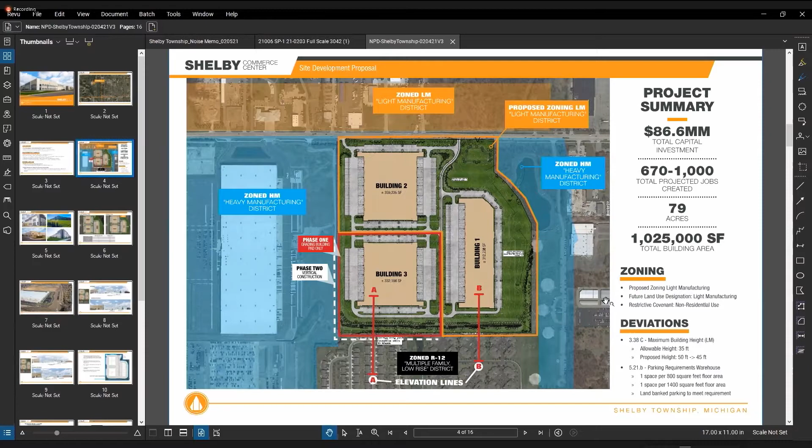Here's a side-by-side comparison of the original concept plan and the new concept plan. The plan on the left is what we presented at the January public hearing, and the plan on the right is the updated concept plan. The main change we made for tonight is we took another look and reduced the overall lengths of building 1 and building 3.

What that allowed us to do was increase the building setback and increase the buffer yard from that southern property line, where the residential properties are. So we took the building setback from 143 feet at building 1 to 249 feet, and from 216 feet at building 3 to 267 feet.

We were able to increase the overall buffer yard width from 90 feet to 147 feet at building 3, and to 170 feet at building 1. The other thing this allowed us to do was increase the berm height.

If you recall, we were proposing a 10-foot tall landscape berm with a 10-foot tall privacy fence on top in the original concept plan. This additional buffer yard width allowed us to take that berm height to 18 to 22 feet, with an average of 19 and a half feet along the entire southern property line. We kept that 10-foot tall fence on top, so our overall height now averages 28 to 32 feet across that entire southern property line.

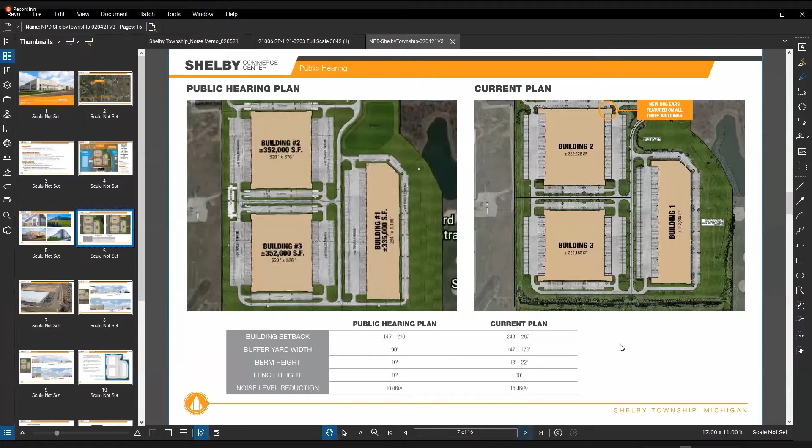Just to illustrate what those look like, this is an aerial picture of one of our buildings in Kansas City that incorporates these dog ear protrusions. You can see it's additional office space that sticks out approximately 60 feet from the building and blocks the trucks as they're backed into this truck court area.

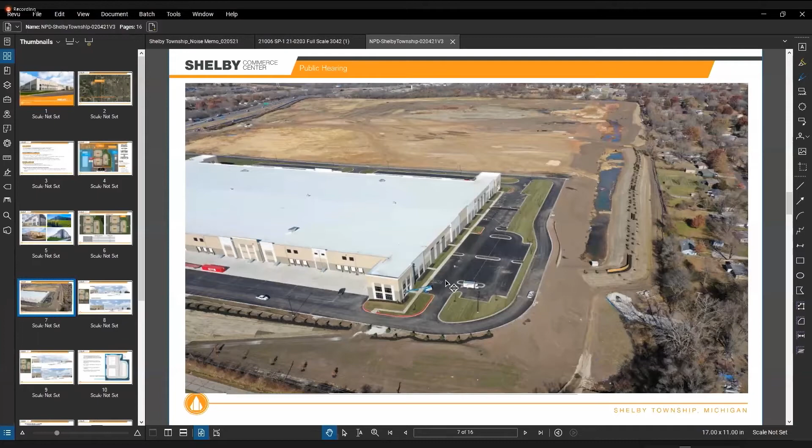This picture is a pretty good representation of the residential backing up to the industrial and what those homeowners see in this particular instance, and it'll be very similar to what this development will look like.

To further help illustrate the differences that this additional setback and additional berming made, we've taken a look at the cross sections we presented last time compared to what the cross sections are today, based on our updated grading plan and setback.

This is an illustration of what residents will see as they're looking at building 3 from the south. The bottom cross section was from the presentation at the January public hearing meeting. You can see the proximity of this truck road to the residential property line, and the sight line of the residences where they were seeing about the top third of those industrial buildings.

Now, as you go to the top cross section, this is what it would look like based on the plan we're presenting tonight. You can see the magnitude of that berm increase - it didn't only get taller, it also got wider. The setback of the main roadway from the property line increased, and the setback from the building increased. You can see that sight line now, as you're looking from this residential property, you actually look over the top of that building. So it's a pretty significant increase in both view and sound, as we'll get into shortly.

Same concept on this slide, except this is looking at building 1 from the south. Again, the bottom cross section was the original concept plan, and the top cross section is with the proposed increased setback and increased berm height. Again, these residences will be looking over the top of that proposed industrial building.

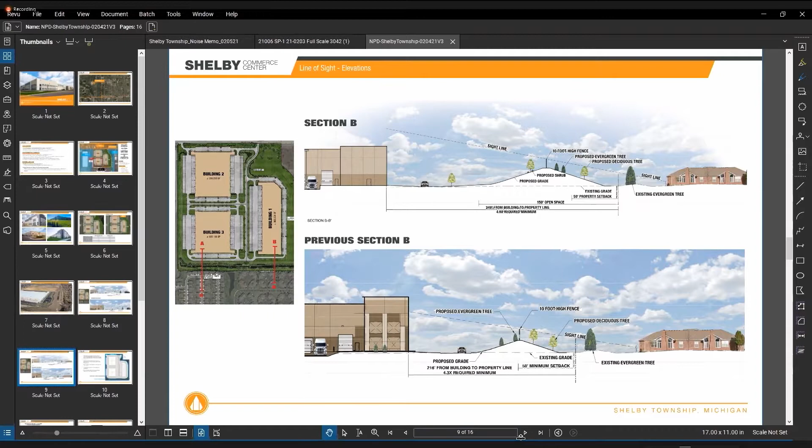We updated our photometric study based on this new concept plan. The dark line is the boundary of the 0-foot candles that the light from this development will produce, and the blue line is the original concept plan. As you can see, specifically along the south where the berm is increased, the light spread becomes even farther from those residential properties based on the new concept plan.

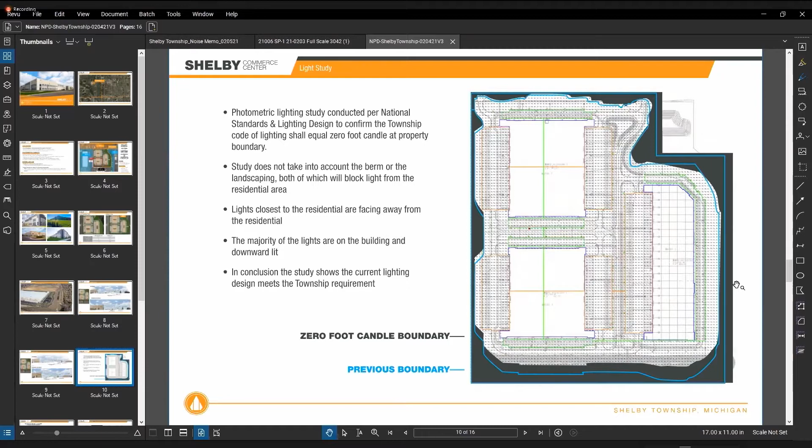We also went back to our consultant who prepared our sound study for us. I took 3 snapshots here to illustrate the changes we've made to the plan over time. The upper left-hand corner was what we presented at the neighborhood meeting back in October, with just the 6-foot berm and no fence. You can see the sound line traveled pretty far into the residential neighborhood.

The bottom left is what we presented at the January public hearing meeting with the 10-foot tall berm and the 10-foot tall fence. You can see it's a significant improvement over the 6-foot berm. The picture on the right is what we're presenting tonight with the 18 to 20 foot tall berm and the 10-foot fence, which helps further limit the spread of sound that's over 65 decibels.

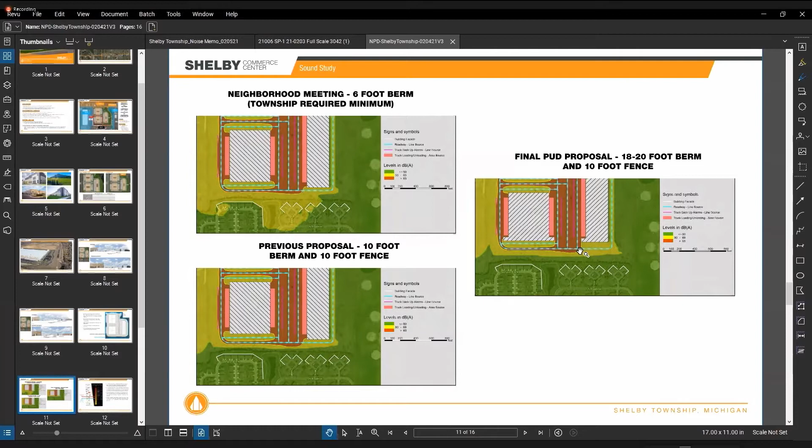Again, this was presented at the last meeting, but it's a good illustration of decibel levels compared to everyday household items.

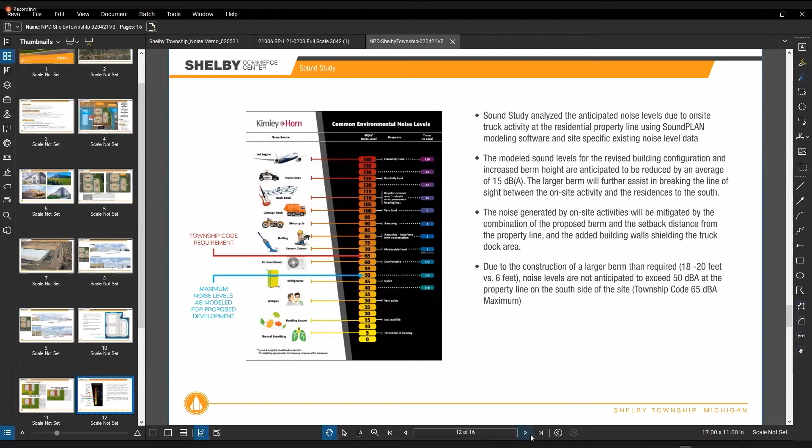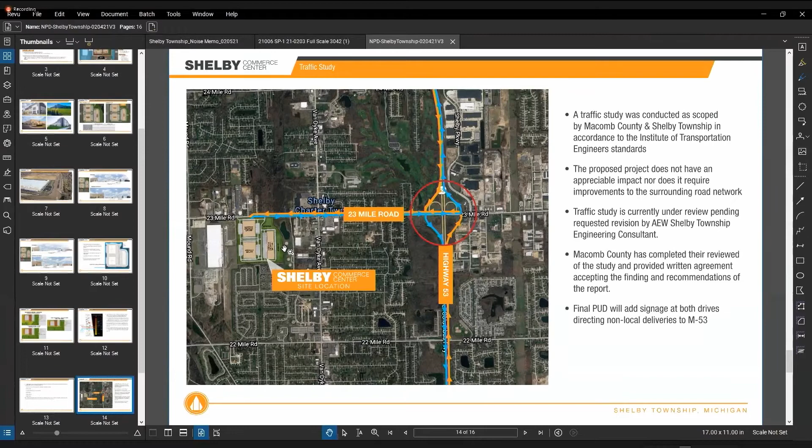Our air quality study didn't change based on the updated concept plan. We're still well below the forecasted annual emission requirements limited by Michigan air quality requirements. The traffic impact study didn't change either. Ingress and egress into and out of the site didn't change, and access to 53 didn't change based on this new concept plan.

One thing I wanted to get into tonight was the criteria that Shelby Township has to evaluate each zoning request on. The Shelby Township zoning ordinance states that the commission needs to evaluate each zoning request on 4 criteria: 1, the practicality of the request and the effect on neighboring property owners or the surrounding area; 2, the owner's right to use his land; 3, do current growth and development patterns warrant this rezoning; and 4, is the proposed rezoning in accordance with the Shelby Township master plan?

We feel that the Shelby Commerce Center development meets all 4 of those criteria. Our proposed zoning is compatible with the uses on the east, west, and north sides of this property, and we've greatly exceeded the required minimums in the township code for building setback, berming, and landscaping in order to reduce the impact on the residents to the south.

Secondly, the owner currently has no ability to develop this property based on the current zone due to the environmental contamination. Therefore, we feel the existing zoning classification is not appropriate. This proposed concept plan and the proposed zoning we are requesting is consistent with the restrictive covenant that will be filed on this property.

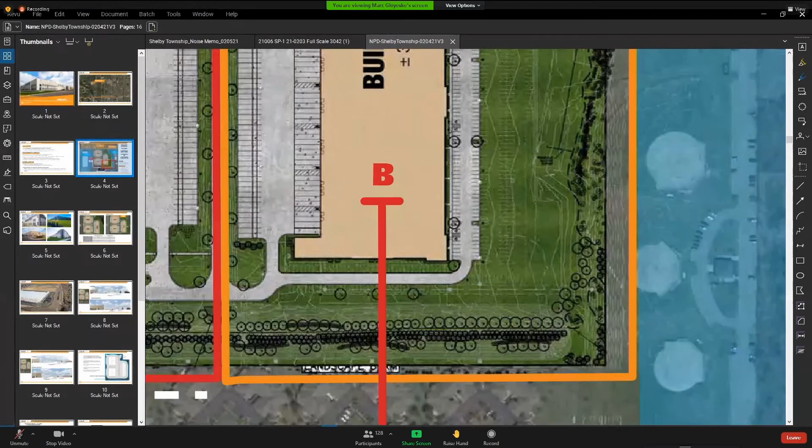Am I able to share my screen again to show the landscaping around the corner there? Yeah, go ahead, you should be able to now. Can you guys see that? Yep, okay. So again, this isn't our final landscape plan, but this is a good illustration of the proposed plants. All of these symbols that you see are the proposed plants.

So our berm is going to stop over in this general vicinity, but we do have plants, trees, evergreens that wrap this corner. So that should help mitigate the sound coming around that corner. Frankly, most of that sound's going to come from the little leaguers in the summer. Right, yeah. And again, just to reiterate, this is car parking on this side, so the eastern side doesn't have any of the truck docks facing it, as I mentioned before.

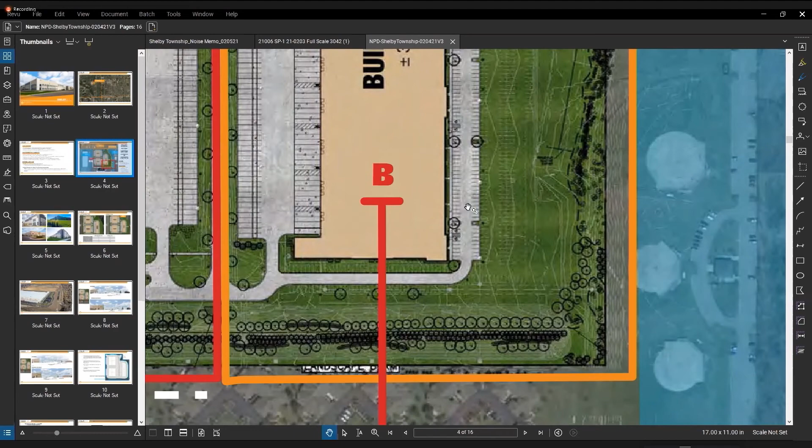Thank you. Anyone else wish to comment? Mr. Chairman, we have some more hands raised from the public. That's okay, we've moved on from that.

If there are no other questions or comments, I'll entertain a motion. Mr. Turner: Given that this is a preliminary process, the first step in this for more discussion, I'm going to make a motion to forward to the Township Board conditional rezoning petition number 6-20 and preliminary PUD site plan number 20-22 PUD 7 for North Point Development, requesting to be rezoned from R1-2 multiple family low rise and R1C one family residential to light manufacturing, and the preliminary planned unit development, with the finding that the proposal has merit and has the potential to meet the requirements of the zoning ordinance and applicable PUD requirements to allow filing for final PUD review based on the following.

The proposed rezoning and land use plan is consistent with the land use pattern recommended in the township's adopted master plan. The current zoning pattern in this area does not fully conform to the established development plan. The deed restriction placed on this property by the current owner and the physical characteristics restrict the property from being developed as zoned. The planned unit development plan has sufficient access to a major thoroughfare, and the proposed use will not interfere with or discourage the appropriate development and use of adjacent land and buildings or unreasonably affect their value.